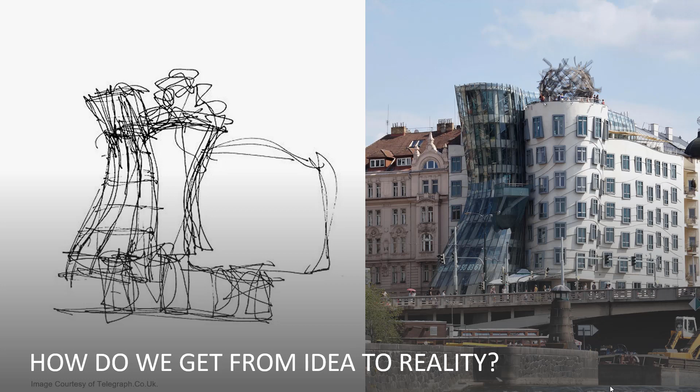To really understand the business value of computational and generative design, let's start by looking at the evolution of ideation in architecture. Traditionally, a building design in architecture was expressed as a single idea, or a parti, meaning the departure point or grand driving idea in a design. Buildings have traditionally been conceived from very broad ideas and sketches, and then refined into the final form. The most basic way we've had historically to express our ideas is with simple lines and forms grounded in reality, such as lines in the soil or sand, arrangements of stone and earth, or charcoal sketches in caves like Lascaux.

With this expression, we're able to convey a wide array of ideas at specific sites, but these ideas were subject to erosion with exposure to the elements, so we turned to a more easily protected medium that allowed for off-site and also mobile expression: paper. With the advent of paper, our ability to ideate expanded into sketches, technical drawings, perspectival renderings, paintings, and we were able to protect our ideas. However, we're not able to easily make changes to our drawings or demonstrate ideas consistently.

And so, with the advent of computing technology, we're able to harness the power of application development to translate the manual process of ideation into a digital space. One where we're able to replicate our previous methods of mark making, with added benefits such as consistent legibility of line weights and repeatable design elements. Moving ideation into the digital space did, however, have a certain degree of drawbacks. Collaborating on ideas was difficult. Model making and drawing were still separate processes. And any insights were generally done as manual calculations and then recorded and manually input into schedules. And so we needed a more robust, integrated process for ideation.

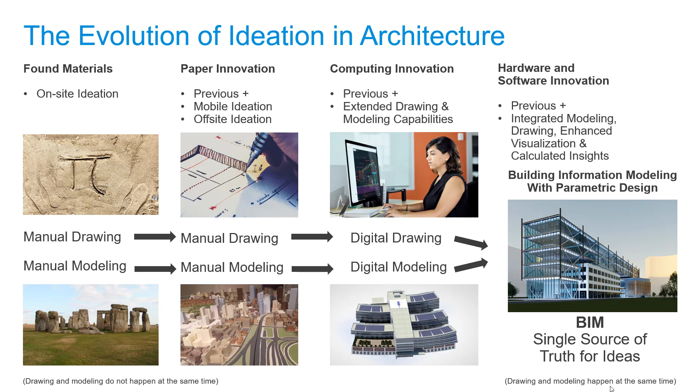With the advent of BIM, we're seeing exponential growth in the next generation of ideation evolution. We're simultaneously seeing innovations in cloud computing, hardware and software capabilities, and artificial intelligence. With these innovations, tools for ideation are evolving to include immersive visualization, enhanced collaboration, automation of design processes, optimization of designs through option generation, and predictive assistance in achieving design goals and project outcomes. So these new ways of working will help us spend less time occupied in repetitive tasks and tedious design option exploration, as complexity of designs is growing while timelines are becoming shorter.

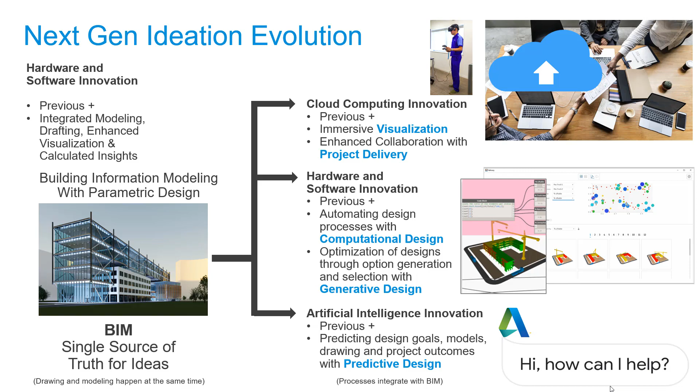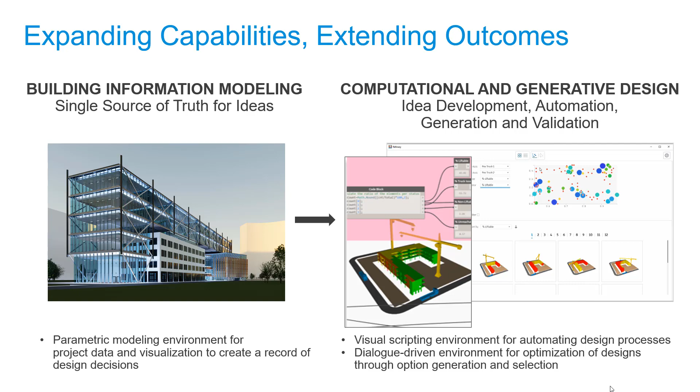Computational and generative design are critical ingredients in the recipe for more efficient building design workflows. Computational design is a term to describe the capability to automate processes, from basic repetitive tasks to geometry creation. Generative design is the term used to describe the capability to optimize processes, utilizing design option generation and evaluation tools to validate designs. These are the two emerging ways of designing that we'll focus on in the context of strategy, adding value, and winning more work.

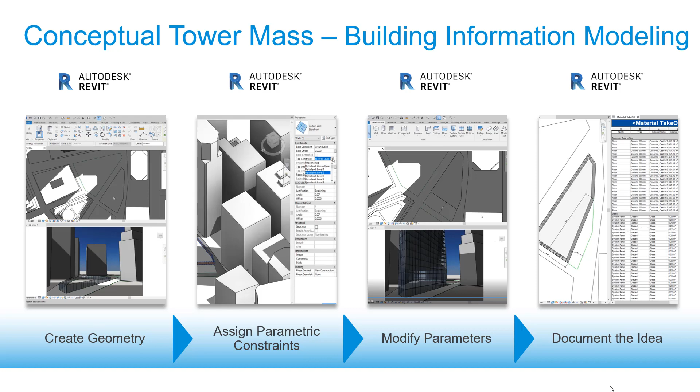When the final design is decided on, the idea may then be transferred from the Dynamo environment into Revit and documented in the Revit environment. The major benefit of Dynamo is that if you need to create the study again, you may now automate the process entirely in a future project environment.

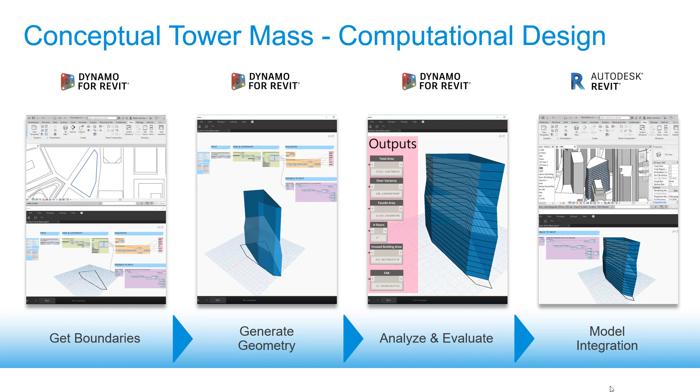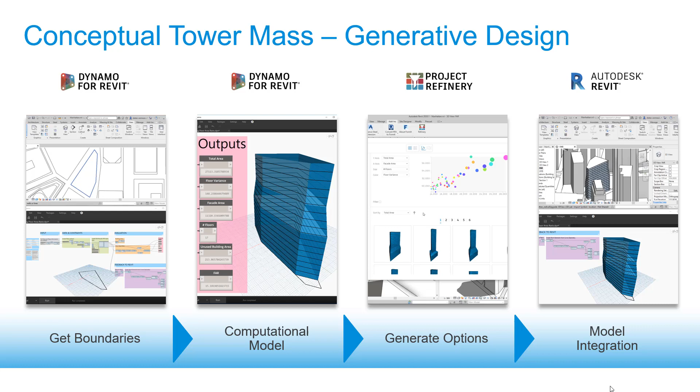When the final design is decided on, the idea may then be transferred from the Refinery environment to Dynamo and into Revit for documentation. The major benefits of this workflow are the ability to automate the generation of geometry, automate the generation of design options, and maintain a record of informed decisions.

Let's talk now on a higher level about project strategy. When designing with what I'll refer to as a traditional project strategy, business leaders within a company are typically kicking off projects with a small circle of stakeholders to identify the project type, some of the big ideas for development, and think about the type of processes that might be used to complete the design work. The design process is a mix of proactive and reactive work, where ideas are produced in charrettes, reviewed in critiques, and often result in sequences of revelations during the iterative portion of the design process. Following iteration, construction is completed, as-builts are delivered, and the project is closed out. Design teams rapidly move on to the next project.

In traditional project strategy, the method for developing design options is a little bit like a game of Battleship. Ideas are tested one at a time, often without enough information to get a hit the first time. We ask ourselves, does this work? What about this? We might get a hit, or we might get a miss. Oftentimes, only a few designs can really be evaluated because the design team runs out of money or time, and the evaluation process can be frustrating, as goals may not be clearly defined to even test against.

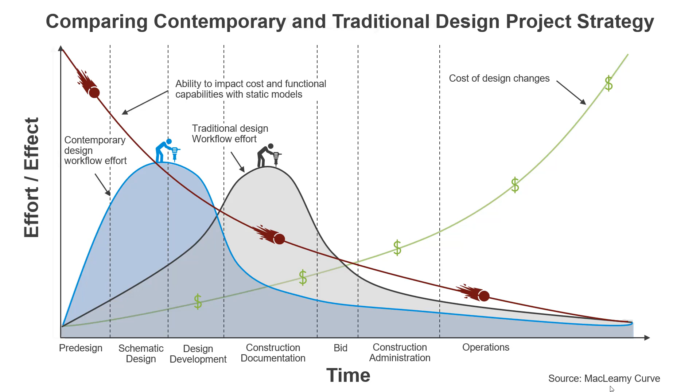The future of project strategy has been heavily influenced by the capabilities of computational and generative design. In order to automate and optimize workflows in the development phase of the design process, a rigorous and extensive discovery process of project and design goals and constraints is required. The design process is then largely proactive, yet flexible, providing the opportunity for downstream ideas to inform upstream development framework, and for specialists to have more and more meaningful conversations, informing design outcomes at any stage of the process.

Beyond simply creating buildings, the future of building strategy is expanding into capturing insights from the building's life cycle, to close the loop between design and execution, and also reality, and using the same data to inform future building typologies, leading to growth opportunity for strategy adopters.

We're calling the next evolution of design strategy outcome-driven design. And we're defining this as a focus on value-driven design and construction with democratized collaboration for enhanced building performance, process efficiency, and realized aligned outcomes. One noticeable difference between our previous strategies and this new strategy is that there's a wider funnel at the outset of work, and that we've expanded our opportunities beyond that of building design into lifecycle management, data aggregation and analysis, and project typology data curation.

With the introduction of outcome-driven design, we can see that the effort put into a building design project is shifting significantly into the pre-design and schematic design phases, and that our ability to design with flexible parametric models, informed by computational and generative design toolsets, allows us to impact cost and functional capabilities later and later on in the design process. An architectural project is difficult to change once it's built, but using flexible modeling tools, designers can delay finalizing decisions until the model is baked.

With the design effort shifted forward, we have opportunities to improve our visualization capabilities by adopting emerging workflows such as Revit and Unity Reflect, pour more time into researching and resourcing local and sustainable materials and systems, and review performance data in Insight, as well as spend more time researching and digging into detailing on the project.

Beyond the traditional design duties, when we implement an approach to design that maintains our relationship with the client throughout the operations of the building, this allows for the curation of the building performance data through advanced analytics. And then we have opportunities to point out where design for the building could advance into a new scope of work or a new system specification.

Also, everything that we learn about how the building is actually performing versus how we expected the building to perform can be integrated into a building database by typology and used to inform the future of your building design with predictive analytics. Now is the time to prepare your data for the emergence of artificial intelligence technologies.

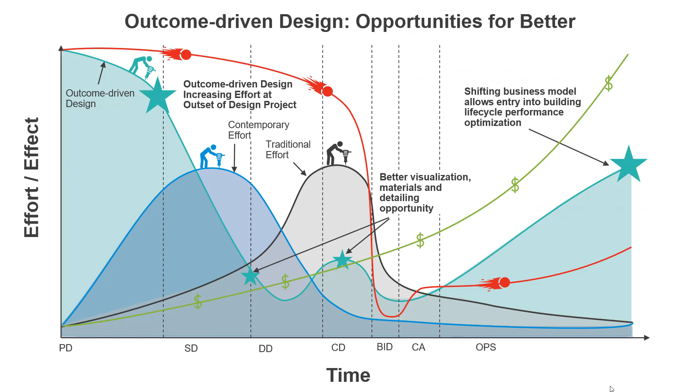In outcome-driven design, there are 5 key components. With strategic planning, the goal is to align all upstream and downstream stakeholders to identify what everyone needs up front to ensure project success. With outcome-driven design, goals and constraints drive the development of form and order in the building information model, with an emphasis on building performance. With parametric analysis, there's an ongoing dashboard of all of the big picture project aspects, like counts, costs, energy analysis, etc., that give the designer the ability to pivot and course correct the project in real time.

With integrated project delivery, we're collaborating in an integrated way that will allow for fast and seamless transfer of data between projects. And with operational nurture, we're extending the scope of our services beyond that of traditional architecture and into customer success, seeing the building through its life cycle process and acting as trusted advisors to our clients.

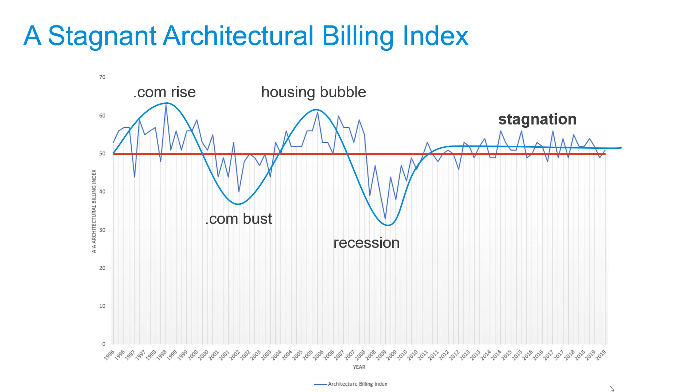On top of this disconnect, we're operating with a stagnating architectural billing index in an uncertain market. And recently, in the US, we're experiencing some billing index woes. The frustrating part of this is that architects' fees are such a relatively small part, 10%, of the total design and construction costs for a building, and 0.01% of the total building lifecycle costs. It would only take a fraction of the cost of the overall design and construction costs of a building to increase our fees. But this is really very rarely the reality.

And we're working amid a really disincentivizing compensation system. The vast majority of work comes in as lump sum or fixed fee payment structure. We're seeing a lot of difficulty in negotiating for higher sums at the onset of a project for building design teams in this fee structure. Margins are tight and competition's fierce, and it's easy for competitors to underbid.

And in researching the topic of payment structures, I've been hearing better feedback on rates from architects working on an hourly basis or otherwise. Not only is the difficulty in negotiating hurting us, but also in the lump sum fixed fee structure, we're seeing the risk transferred onto the building design team for work completed. And we're working with a client who may not have any special consideration for the process by which we work. So something fundamentally critical for our industry to implement in our projects, such as sustainable design practices, may be easily disregarded by all parties.

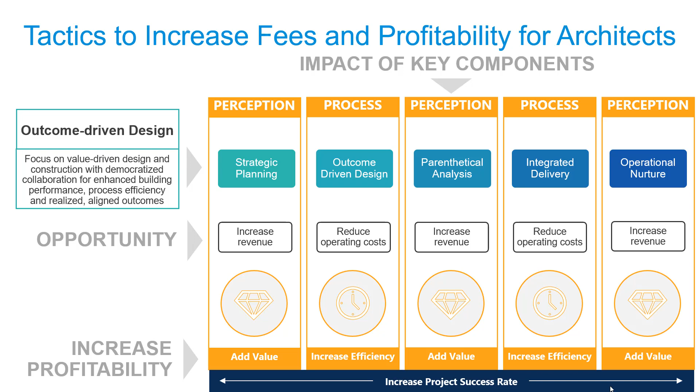With the emergence of outcome-driven design and integrated delivery, we're able to set clear targets and expand the amount of work we're able to do exponentially in significantly smaller amounts of time to increase efficiency and reduce operating costs for design firms as well as clients when completing the design of a building. With all 5 of these components in place, we're able to increase our project success rates and win new work.

With the implementation of this strategy, we're going to see several new roles emerge. A design strategist will be critical in the strategic planning phases of work, where skills such as Luma training and soft skills guide the gleaning of project requirements from key stakeholders. The design strategist will work closely with the design analyst and the outcome-driven design team to ensure that the value captured from clients turns into measurable metrics that drive design and are tracked and analyzed throughout the project.

A design technologist is one part of the design technology team that will ensure that all design processes are optimized for efficiency for building design. The design analyst will be a new role that operates as the air traffic controller for ongoing projects and will track performance metrics as the design develops, flagging aspects of the model as they underperform or go off the rails, and ensure that the project team is aware and able to pivot for project success.

The delivery technologist works closely with the design technology team and ensures that collaboration capabilities are utilized and functioning properly for federated models. The building design outcomes lead is the main interface between the company and the client during the operational phase of the building and ensures that the building operates as expected, provides insight into emerging systems and technologies to implement, and discovers new scopes of work based on usage. Ultimately, the building design outcomes lead is responsible for ensuring customer success, anticipating needs, and maintaining a long-term relationship with the client.

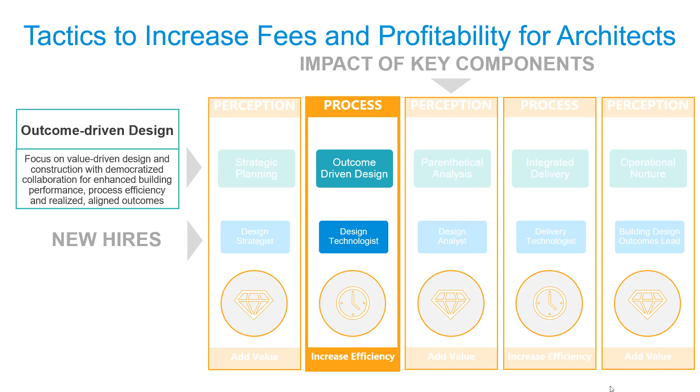For the sake of our focus on the business value of computational and generative design, let's drill down into the design technologist and the design technology team. These are the key players for the future of design technology. They will all be able to concentrate, recognize patterns and moves ahead, synthesize combinations, connect field experience with abstract logic, and capture datasets required for abstract logic development. The CTO acts as the strategist and liaison for the design technology team to executive staff within the company.

The design technologist role is to look at emerging technologies in a broad way and vet the application of tech for usage in projects. The BIM manager role is to develop and ensure that all projects in the company are using the same template, data standards, and model management practices. The computational designer role is for a specialist with extensive coding knowledge to develop graphs that automate tedious processes for the company. The generative designer has a role that is part technical and part analytical, and requires the ability to move back and forth between strategic planning, value discovery, performance metric alignment, process implementation, and review.

In a very small business, one person may act in all of these roles. But given the levels of development in each arena, I would strongly recommend filling these 5 roles as part of every technology team to ensure that your company is at the front end of the outcome-driven design adoption wave.

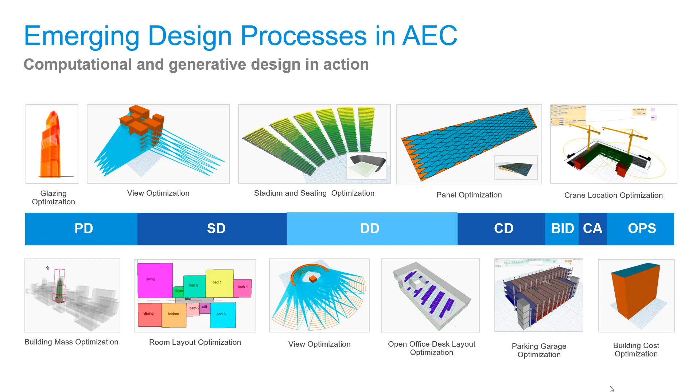Whether optimizing building forms based on view opportunities, glazing, or cost, or ensuring that desks are laid out the best possible way, computational and generative design are making process automation and optimization possible and integral to the design process. To get started with computational design, the tool to use is Dynamo, Autodesk's premier computational design tool. With Dynamo, you can save time by automating processes and model more sophisticated design geometry using simple data, logic, and analysis.

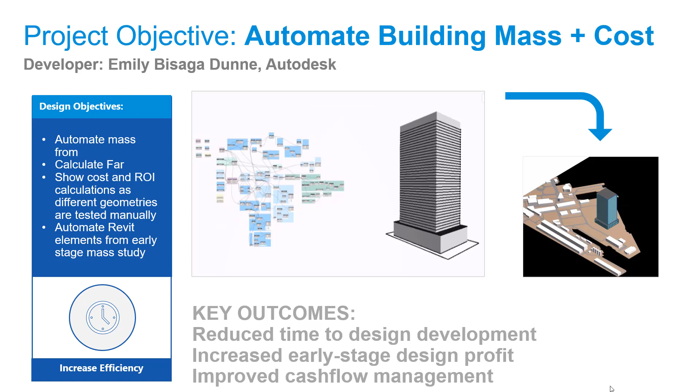With Dynamo, changes and updates to projects become exponentially easier and more time efficient. In this example, we're looking at an early stage design study with an objective of automating the building mass and cost. This example shows testing a variety of variables for a rectilinear massing model to optimize the tower ROI, or return on investment, by way of Dynamo for the key outcomes of reduced time to design development, increased early stage design profit, and improved cash flow management.

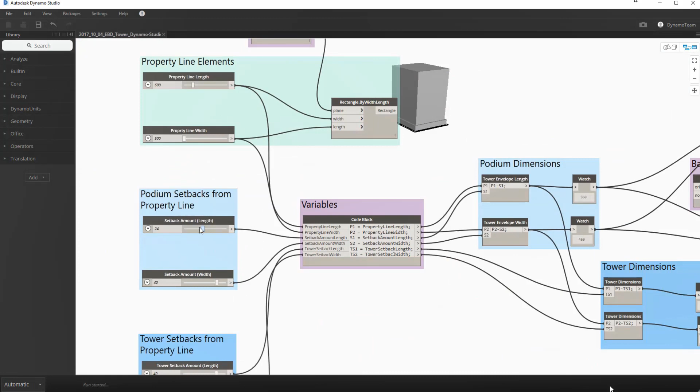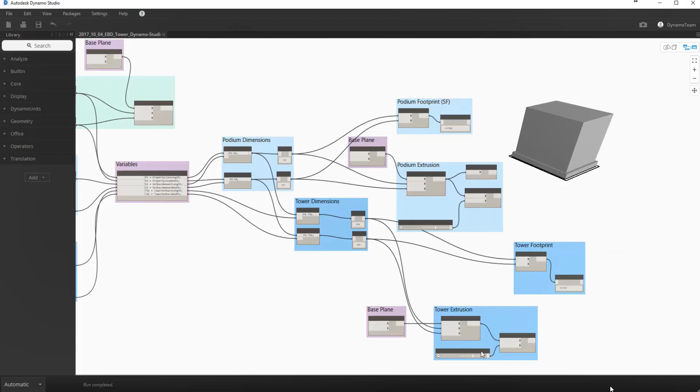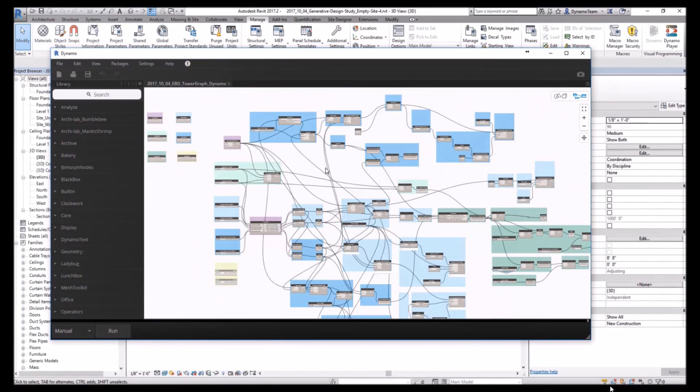You can see that it's possible to flex parameters with sliders in the Dynamo environment, and in turn, this flexes the geometry for the tower height, and also the tower floors and podium, and even setback-driven geometry. Levels are defined within the Dynamo environment, and the mass is brought into Revit, where it's possible to generate roofs, walls, and floors from the conceptual study in Dynamo. Here we see the realized form in the Dynamo environment as well as in the Revit environment.

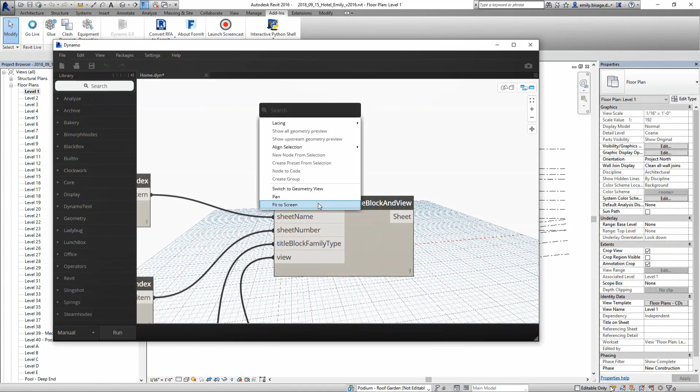Beyond geometric iteration, Dynamo is incredibly useful for automating repetitive tasks that consume countless hours during the design process. In this example, we're automating sheet development and placing views on sheets for the key outcomes of reduced time to design development, increased early stage design profit, and improved design change management. In this example, we can see that there are 40 views in the project browser for levels 1 through 40, and the task at hand is to create sheets for these views and place these views on the sheet. A task that may typically take a team member 30 minutes to an hour may now be completed in 5 minutes with the click of a button and a reusable Dynamo script.

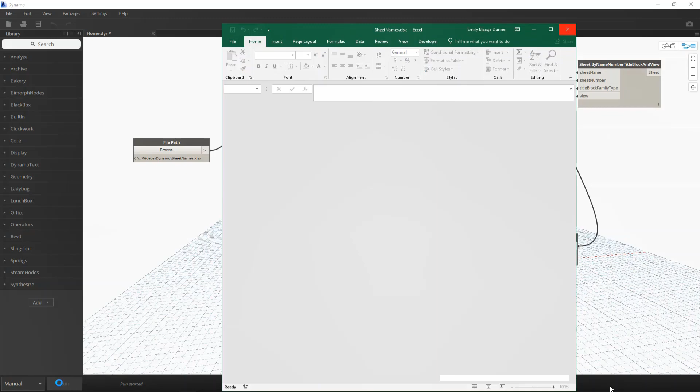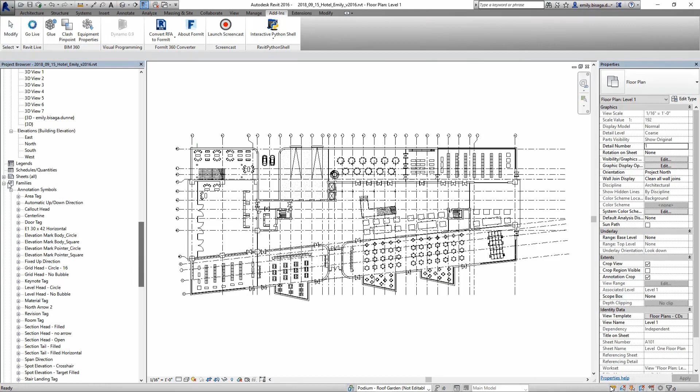As you can see, we've launched Dynamo from the Revit add-ins toolbar, and we have a script ready to go for the task at hand. In this case, we're driving the sheet names and numbers with data from Excel and using some clever filtering in a list to specify the views to place on the sheets. As we run the script, using the manual run process, the Excel sheet opens up, while referenced, and Revit and Dynamo work together in the background to complete the task. With enough time for you to get a coffee, come back to your desk, the run is completed a few minutes later. And we can see in Revit that the sheets have been automatically added to the project, and the views are placed on the sheets. Pretty cool.

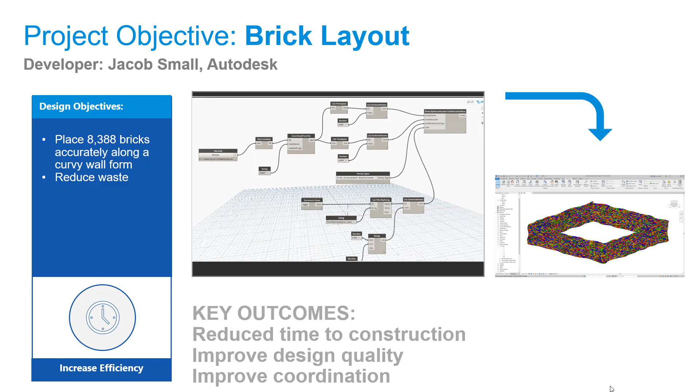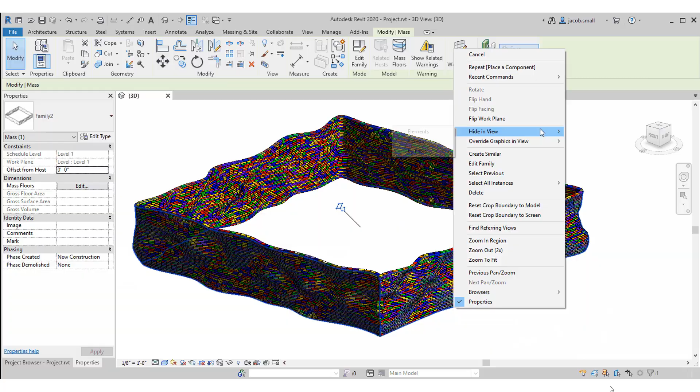In this example, by Jacob Small, we're reviewing the automation of placing 8,388 bricks on a curved wall for the key outcomes of reduced time to construction, improved design quality, and improved coordination. This allows us to build up a meaningful digital version of the model as the bricklayer would lay it out on site to optimize the location of control joints and sequencing, and ensure that the brick course is laid out properly or not. Here you can see all of the bricks laid out in the Revit environment. It's really, really impressive what you can do using Dynamo to automate tedious tasks.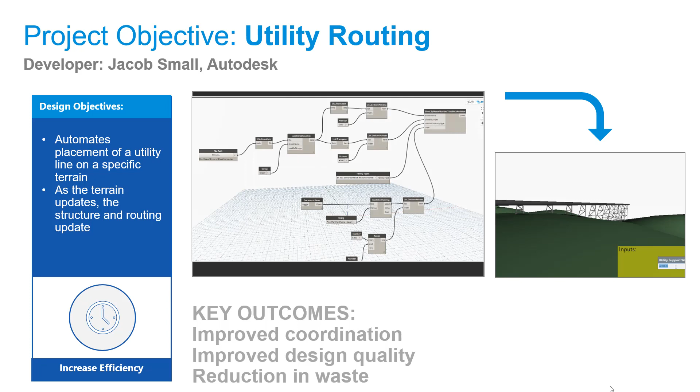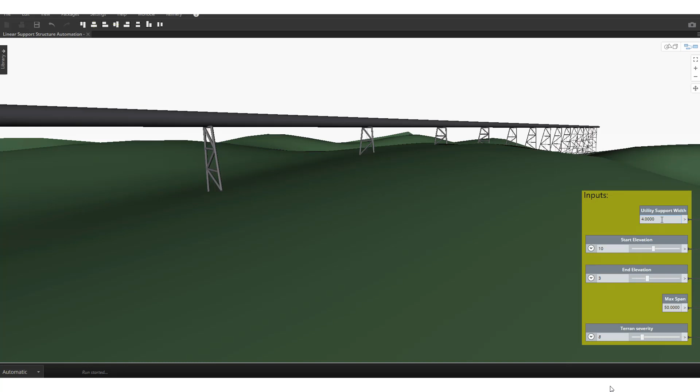In this example by Jacob Small, we're automating utility routing by automatically updating the utility line placement and structure on the landscape as the topography changes. This graph actually parametrically builds up support structures, and this results in improved coordination, improved design quality, and a reduction in waste. This example works using both Revit and Civil 3D. As mentioned, when the terrain's updated, the structure that supports lines is also updated. The structure really then informs the routing of the utility and uses the least amount of materials possible. You can see that parameters are adjusted in the inputs portion of the graph, and the geometry is then updated in a visual way in Dynamo's geometry preview.

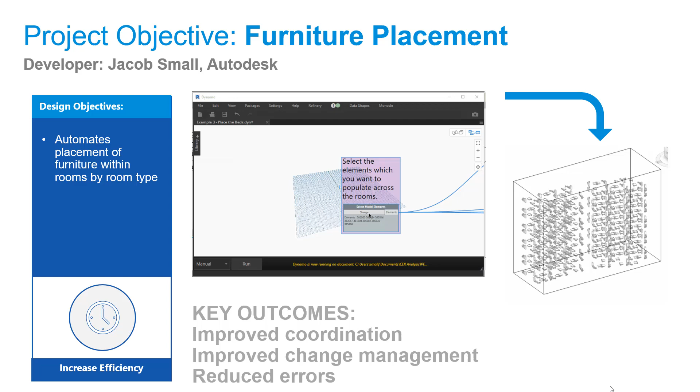In this example by Jacob Small, we're able to automate the placement of furniture by room type, resulting in advanced propagation of changes in the Revit model, and also in improved data for fabrication, reduced waste, and reduced cost. In this example, we start in Revit and review which room we would like to copy elements from, and make sure that we paste that string into the Dynamo graph. Next, we're also selecting the elements that we want to populate across all of the other rooms in the project. You can see in Revit that the elements are being selected after selecting the Dynamo node for the elements to be selected from.

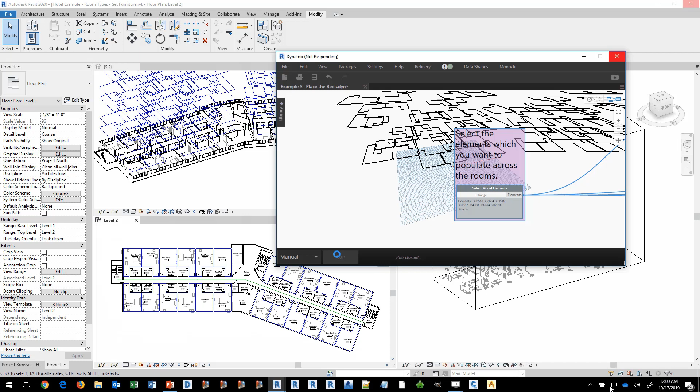Once all of this is selected, we then go into our Dynamo graph and we're able to run this manually. And when we do that, you'll see that across the entire project, all of these units are updated with the proper furniture. This is an extremely efficient way to make updates, especially for a project typology like multifamily development.

In this example by Dieter Vermeulen, Dynamo is used to automate conceptual structural steel designs. This is a Diagrid structure for the Mars Torus Arena. The geometry in the study is created by minimizing waste, structural weight, and total cost of the structure, including influence of tooling, such as connections, beam cuts, etc. And this results in improved data for fabrication, reduced waste, and reduced cost.

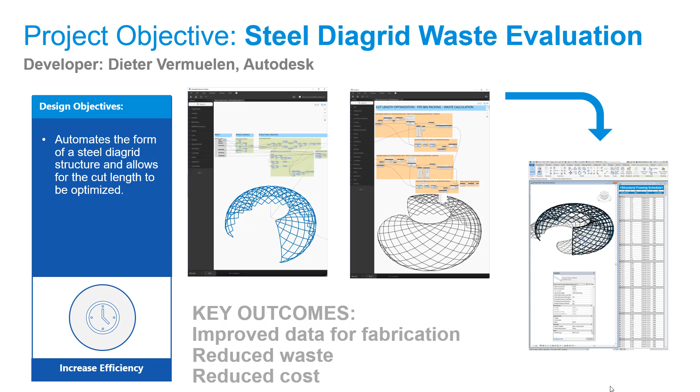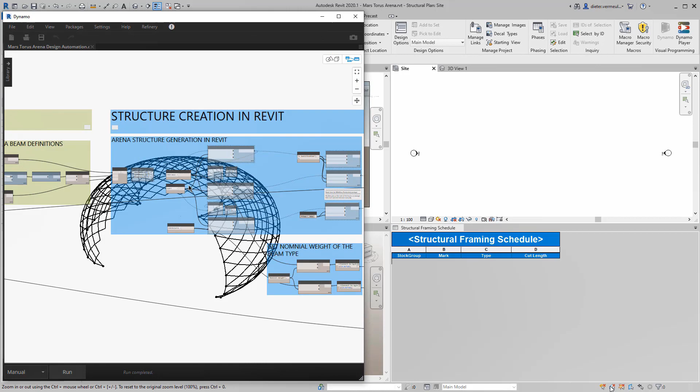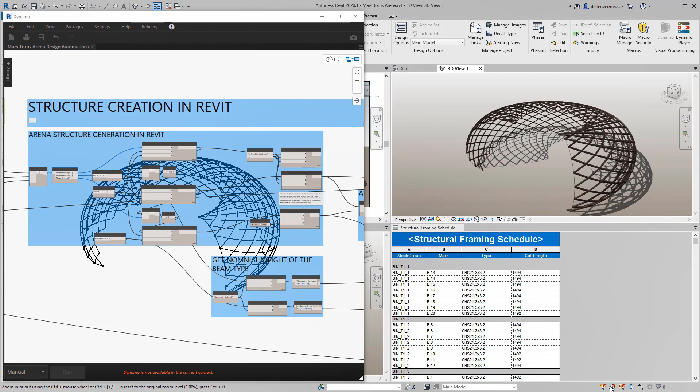The variables for the structure are dimensions such as the height of the torus and the division of the diagrid. A business value for a customer utilizing this method of design is that they can generate structural designs that are economic, also lightweighted, and more importantly, cause less steel manufacturing waste. Dynamo allows us to understand design options in a visual way, and the geometry can be studied using sliders within Dynamo and again visualized within Dynamo and Revit.

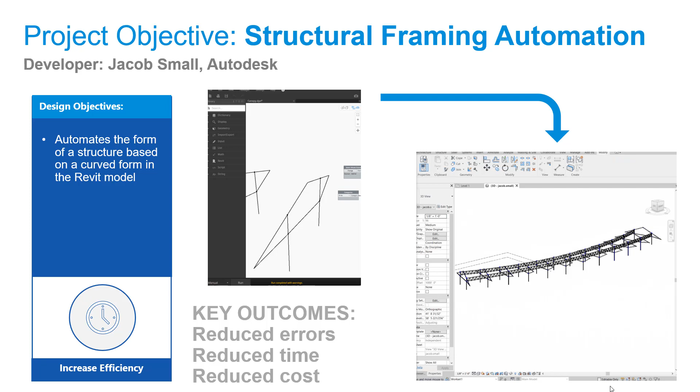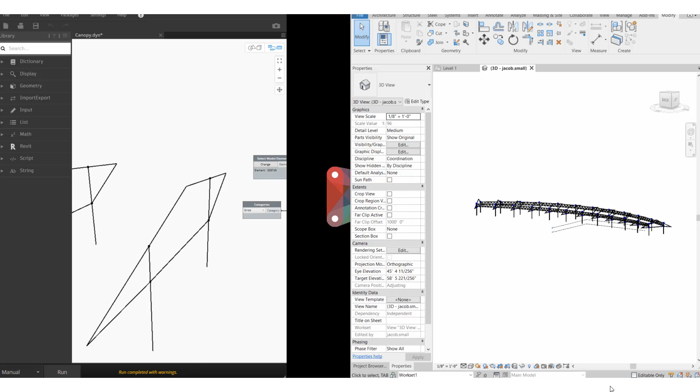In this example by Jacob Small, Dynamo is used to automate the structure of a curved form in Revit in order to reduce errors in production, reduce time of production, and reduce the overall cost of the system. This is a great example to just show a very practical application of Dynamo in the structural phase of a project for efficiency gains. We're able to select geometry in Revit and run a graph in Dynamo that then automates the structure of a building form even when complex and curvy.

This video by Artem Boyko was making rounds on the internet lately, showing an automated process of placing columns, plinths, trusses, and sandwich panels versus a manual process, and had a runtime of 1 minute 10 seconds versus 1 hour 2 minutes. I would recommend running the numbers for time to completion and number of errors on manual processes to get a sense of baseline figures, and then calculate the automated time to completion and multiply by the number of projects in your firm to understand both time savings on a single project and also time savings and ultimately cost savings on your entire company by implementing these processes.

The additional benefit of automating tedious tasks is that there will be a reduction in errors from X% to 0%. And this is extremely valuable to note, as we know that small problems upstream can trickle down into larger problems downstream, with major cost implications in the design process.

Project Refinery is an Autodesk generative design beta for the architecture, engineering, and construction industry that gives you the power to quickly explore and optimize your Dynamo designs. With Project Refinery, changes and updates to projects become exponentially easier and more time efficient.

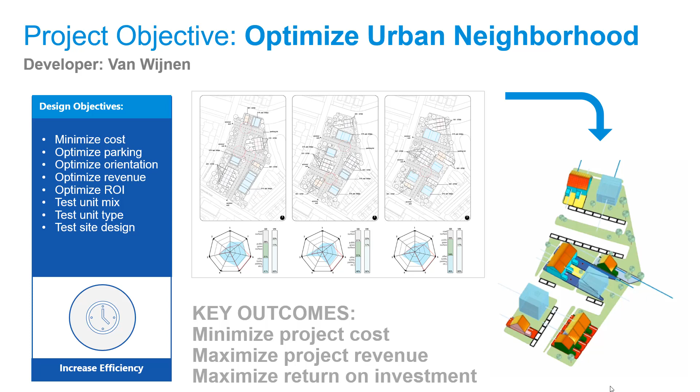As a result, the designers on the project were able to maximize the amount of solar energy collected to meet their net zero energy goals. They optimized backyard size and views to meet the human needs of their occupants, and they optimized cost and profit to meet the business needs of their company.

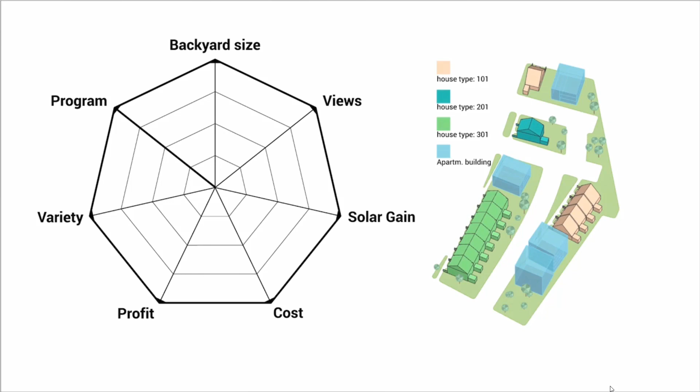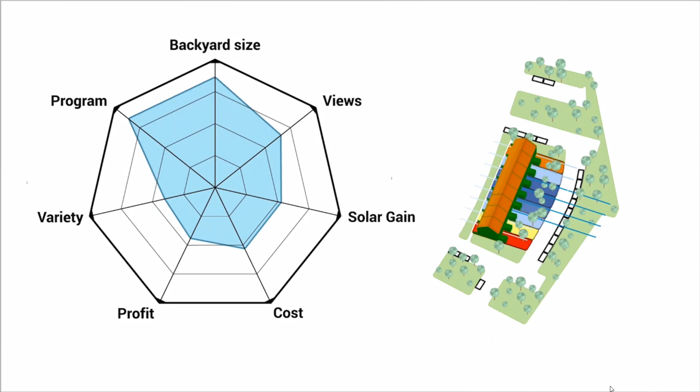Here, we're looking at what is commonly referred to as a spider graph in the generative design world. This graph shows the values that are critical to project development, such as views, solar gain, cost, profit, variety, program, and backyard size. The design elements related to the ideals are revealed as the graph advances in the visuals. As the studies run and the designs shift, the results are shown in a way that makes it easy to understand the push and pull between the values involved and ultimately choose the optimal design.

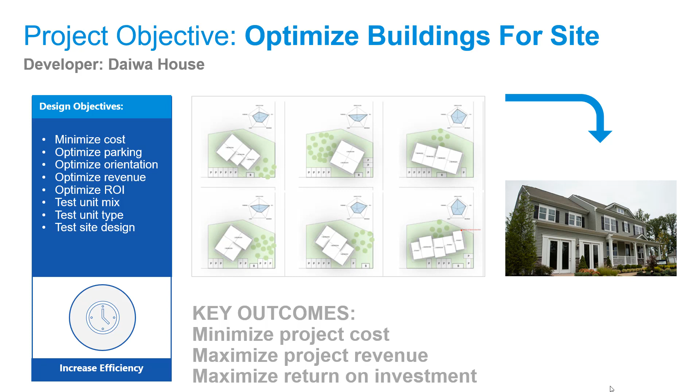In this example, by Daiwa House Group, we're reviewing the optimization of buildings for a site. Daiwa House is a company located in Japan that has been taking an industrialized approach to the craft of designing housing for decades. Today, housing is still one of their core businesses, but they've used automation and optimization to extend their industrialized approach to condominium and care homes, resorts and retail parks, hotels, and even hospitals. Daiwa House Group uses Autodesk generative design tools to identify the best small developments to build on small pockets of urban land. Designs are optimized based on a variety of factors such as cost, parking, orientation, ROI, and even revenue.

Again, we're seeing the utilization of the spider graph to optimize the layout of the site and review the results in relationship to the values that are driving the design. And this leads us to optimal solutions for development.

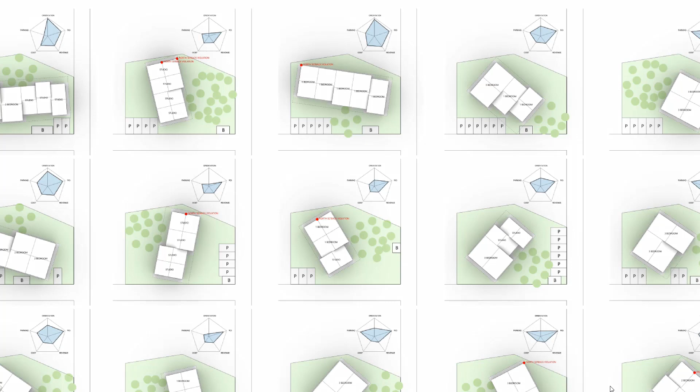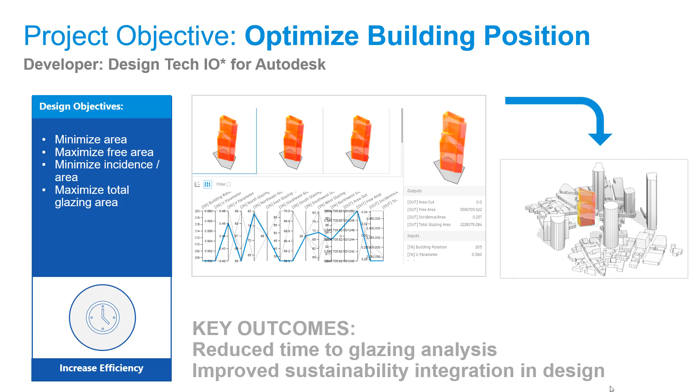This is an example by DesignTech.io, and we're looking at optimizing the building position on the site. Starting from the selection of a tower mass, the graph here iterates to find the best position within the site boundaries, taking into account the solar incidence and total glazing of the building, resulting in reduced time to glazing analysis and improved sustainable integration in design.

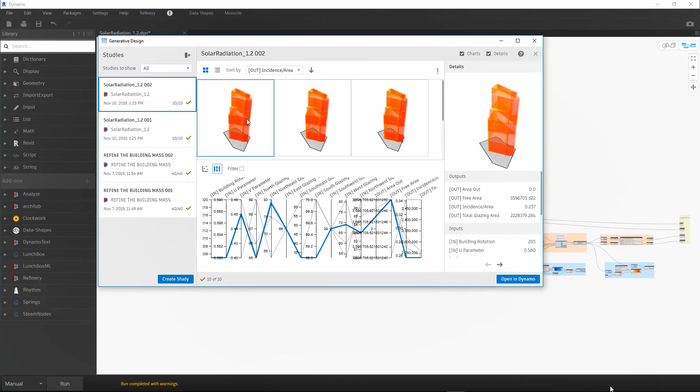We can see the mass in Dynamo, and in this example, Project Refinery is being used to generate options and drill down into the best possible selection by filtering based on solar incidence and glazing performance. To avoid options that don't comply, specifically that are outside of the site boundary, the results are heavily penalized, saving computational time by making the analysis actually fail on purpose.

The result of all of this is the optimized building form shown here, and we're actually able to push this data into Revit and continue on with the design.

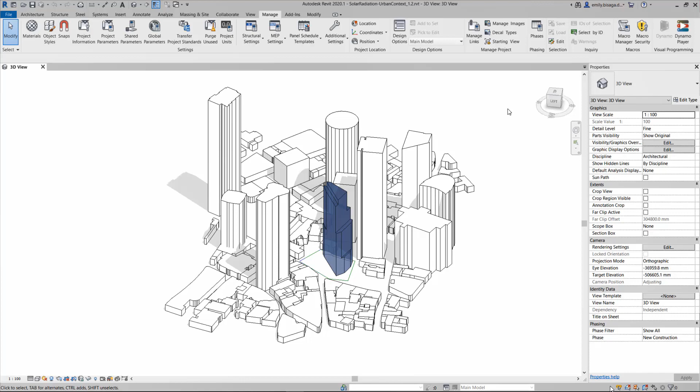In this example, by the Project Refinery team at Autodesk, we're reviewing the optimization of the building program for a mass in the early stage of design. This study explores the allocation of retail and office space distribution while minimizing cost and maximizing rentable area. And this results in minimizing project cost, maximizing project value per year, and adding demonstrated value through pro forma analysis visualization.

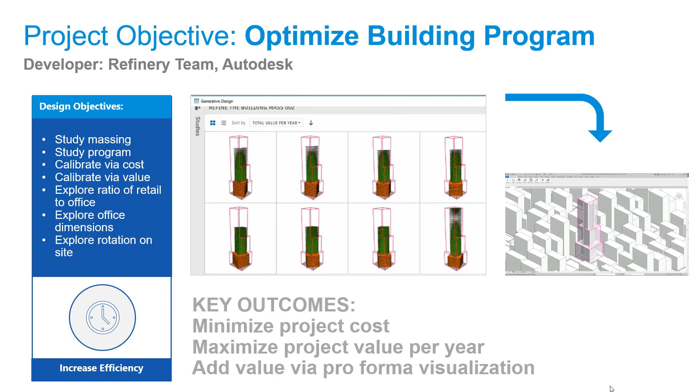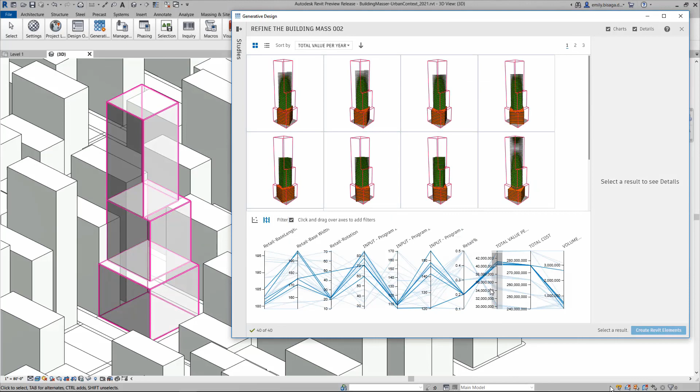This video, shown during the AEC keynote at AU, shows generative design integrated in the Revit environment, showing the ability to run the optimization without entering the visual scripting environment of Dynamo, making generative design processes more mainstream so that more design teams have this supercharged ability to explore the best possible solutions. This example studies massing and programmatic distributions for an urban site.

In this example, by Jacob Small, we're reviewing the optimization of a floor plan layout based on proximity and noise ratings and scores. In the space planning graph, we're able to test out thousands of different designs for a floor plan and find the optimal solution.

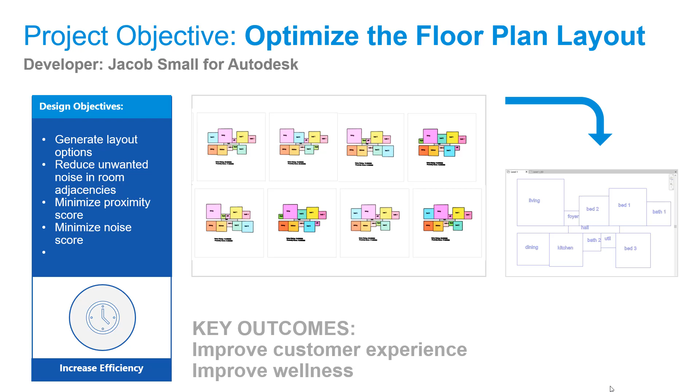This example starts in Excel, where data for noise and proximity scores are developed and adjusted. This data is then brought into Dynamo, and we're able to make manual adjustments to room layout with the slider option in Dynamo. Project Refinery makes it possible to study hundreds or even thousands of options as necessary, and filter down to the best possible option.

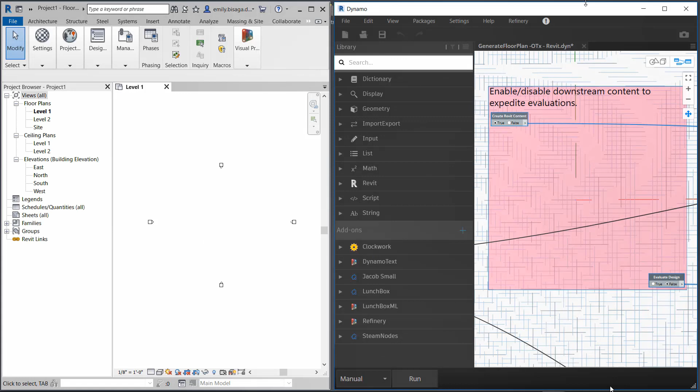Once the final design is chosen, Dynamo automates the creation of room separation lines in Revit, where the design team is then able to keep going with the design. In this process, we have the implementation and automation on the front end, and manual processes on the back end of the design.

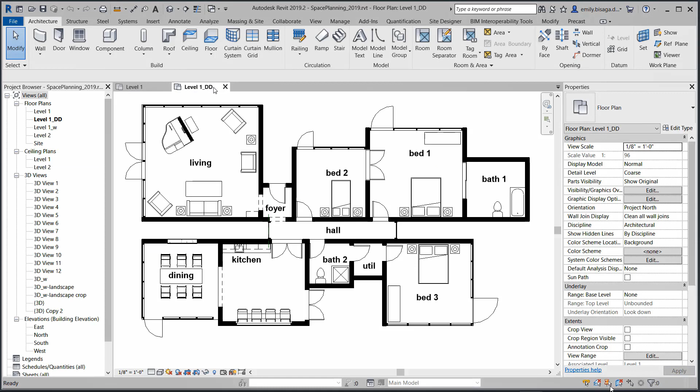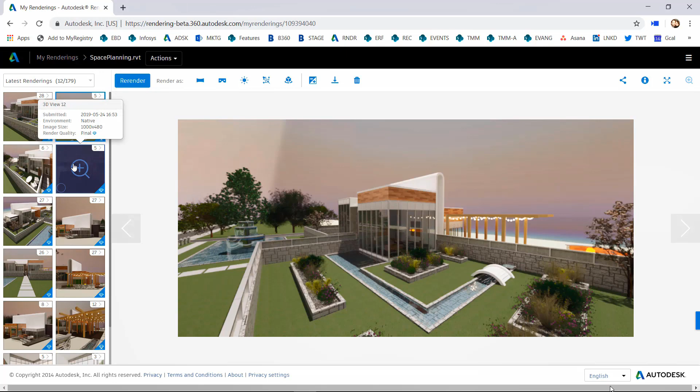I really like showing this example because this process highlights the importance of the design team in guiding the project successfully through the design development portion of the timeline, and shows that at certain points in design projects, and for certain building typologies, our crafted approach is still an ideal and completely valid approach to design. The future of design will always require the human hand and human touch to drive visualization, materials, systems innovation, sustainability research, and the subtleties of meeting client needs.

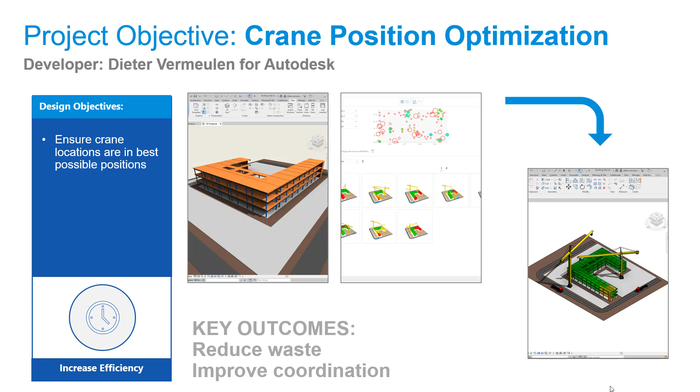In this example by Vermeulen, we're reviewing a crane position optimization that evaluates the imported crane construction elements from Revit through SAT based on their weight and distance to a double tower crane setup. The calculation groups elements per lift status and returns a total lift score for the situation. This results in reduced waste and improved coordination.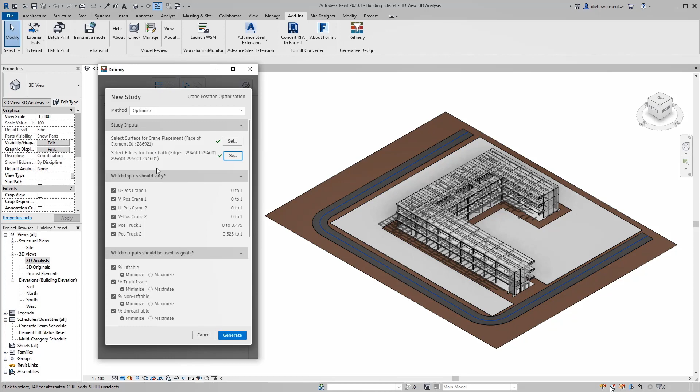Building elements such as walls, floors, columns, and beams are imported through SAT, and data references such as crane capacity tables are constructed at the beginning of the graph. The input for the optimization is both crane and truck positions, and the goals are based on lift score as well as time, using the distance of the truck to crane and crane to solid center point as indication of time, and trying to minimize the time that the crane is used for each installation.

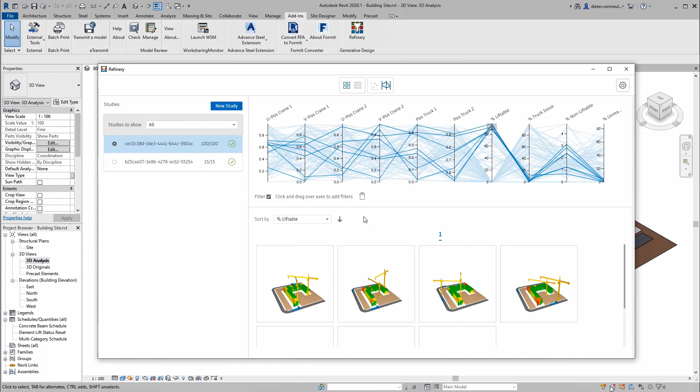The resulting options show the scores for the crane positions relative to time and make optimal selections a simple task for the design study.

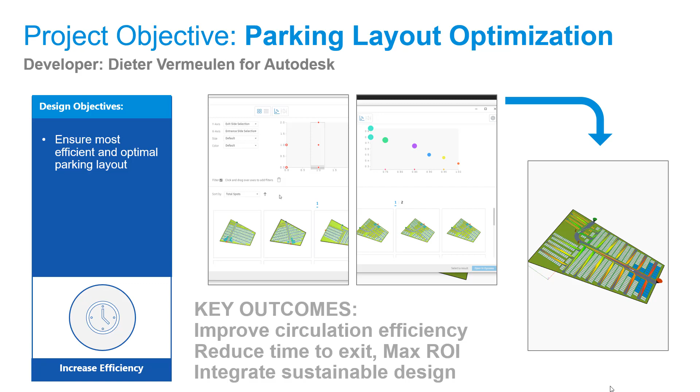In this example, by Vermeulen, we're reviewing parking layout optimization. We're able to optimize the location of entries and exits, the direction of rows in the layout, the density of the layout itself, the location of payment terminals, and the location and density of electric vehicles, resulting in improved circulation efficiency, reduced time to exit, maximized ROI, and integrated sustainable design.

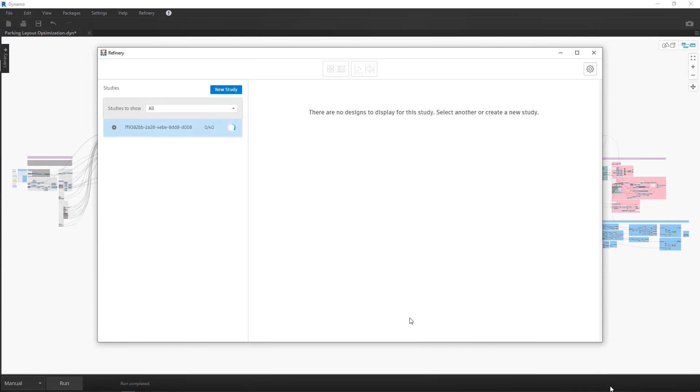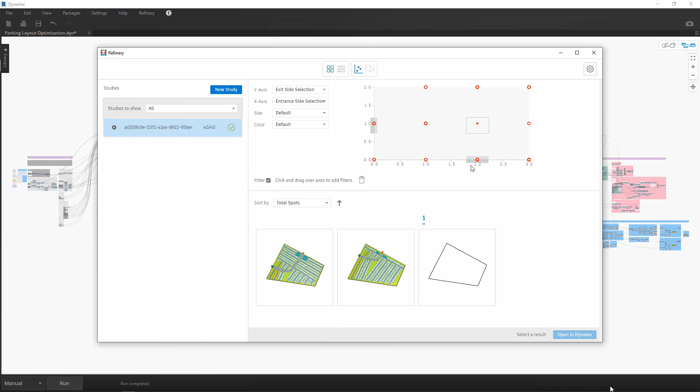We're looking at the graph in Dynamo that drives the relationships between elements and the visualization of the design. Utilizing Project Refinery, a study is created that allows for optimization of which side the entrance and exit are on, as well as where the points for the positions of those elements are located. Also, which directions the two rows for the lot run in, and also for the density and location of terminals and electric vehicles.

Refinery helps the designer sort and filter down to the best possible options. This type of capability development will have a lot of meaning for real estate developers and designers looking to visualize early-stage ideas about site development quickly with trade-off analysis.

In this example by The Living, a design studio within Autodesk, we're looking at a very complex method of optimizing an open office layout. The context of this project is that Autodesk moved our Toronto office to a new office in the MaRS Discovery District, and The Living used a generative design approach to design the new office's space layout.

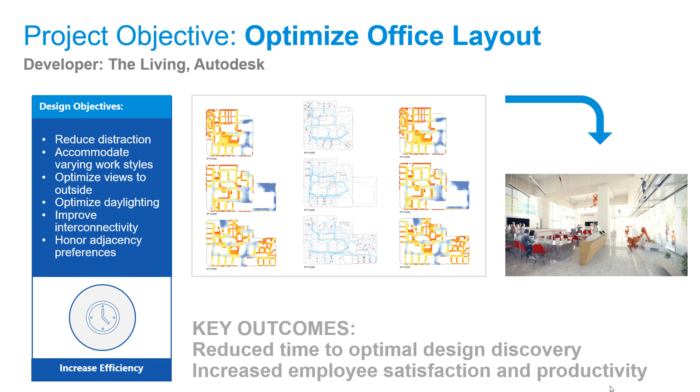They started by surveying the participants of the existing office, asking them questions like, what groups do you want to sit by? How much distraction can you handle at your desk? Is daylighting important? They boiled all this data down to 6 measurable goals for a good office and created algorithms to measure each goal and develop the design, resulting in reduced time to optimal design discovery and increased employee satisfaction and productivity.

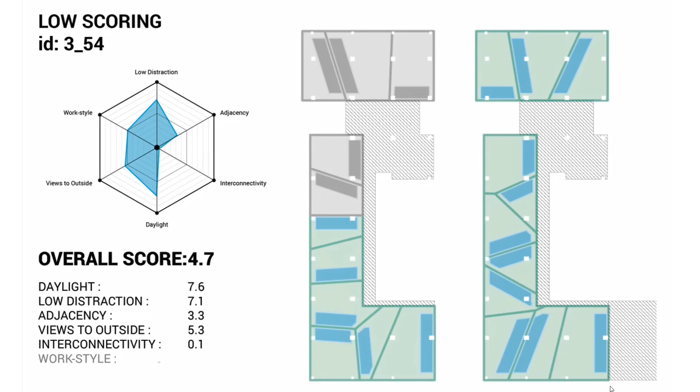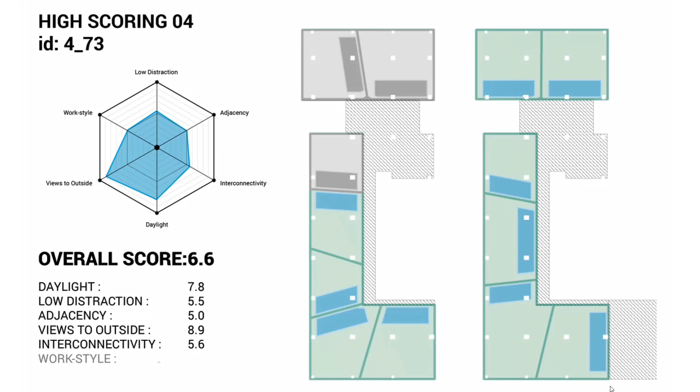Here you can see the process running as different floor plan layouts are created, each with blue amenity bars of meeting rooms and yellow locations of desks. Each design option also involves a dashboard of performance according to its score on the 6 goals. We can see the spider graph revealing score relationships for daylight, distraction, adjacency, views to outside, and interconnectivity.

The ultimate takeaway from generative design studies is that we're able to achieve so much more than we were ever capable of by hand. And this is going to give us more time to add more value to projects and extend our services, as well as reduce time on operating costs where those costs are simply unnecessary.

With generative design, the outcome of the search and discovery process is completely dependent on the design of the design space, as well as the specification of various measures and search parameters. So, how do you design a good design space? Some things to keep in mind. Values and outcomes are equally as important as the building design itself.

And we need to rethink the emphasis we put on value discovery through the integration of a highly involved strategic planning process for all design projects that involves offsites with stakeholders up and downstream for 1 to even several weeks, and places emphasis on how we design the framework of our designs, rather than just completing designs themselves.

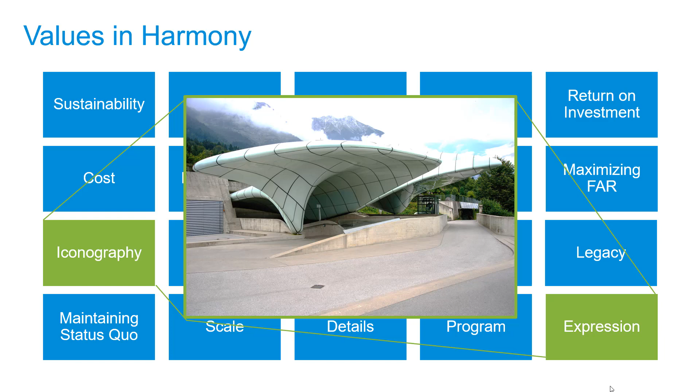For buildings, it's possible to have values in harmony that result in innovative forms, such as this building by Zaha Hadid. And it's also possible to have a very large sample of values that lead to a complex design, such as this academic building. It's also possible to have competing values, even from the same client, that lead to conflicts in design desires and option generation. The earlier the design team can discover something like this, the better.

Outcomes ultimately drive investment, and this is another critical aspect of implementing a generative design process. When money's on the line, the person controlling the funding needs to clearly understand how their investment will bring them a return and what this means for their bottom line. Oftentimes, emerging technologies are put aside because they require an upfront investment, and there's not a clear sense of the business outcomes for adopting these practices.

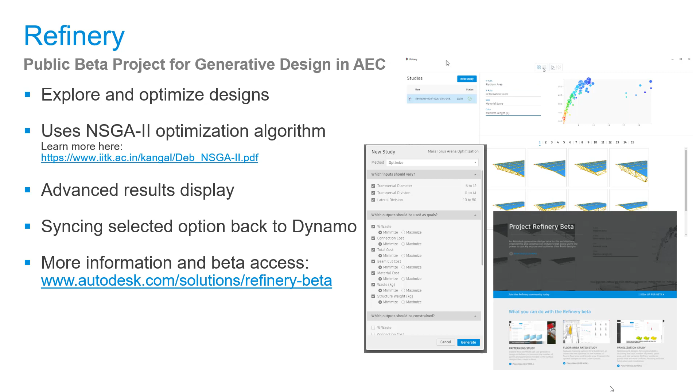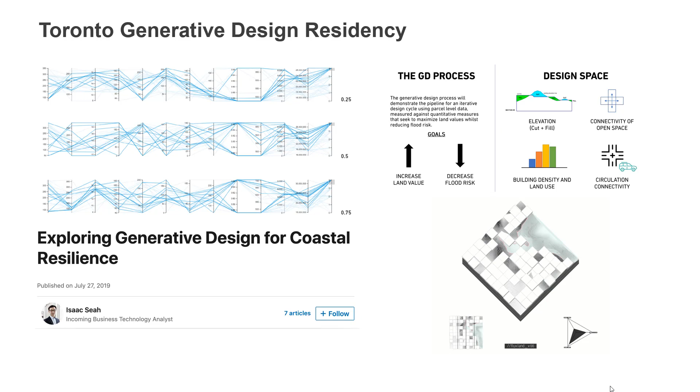Once you have staff in place to work on computational and generative design projects, I would recommend investing in their problem-solving development by providing them learning opportunities at residencies and hackathons. These types of events give developers exposure to high-level approaches to problem solving by their peers and reveal new methods for implementation, such as using bin packing algorithms to solve spatial layout problems.

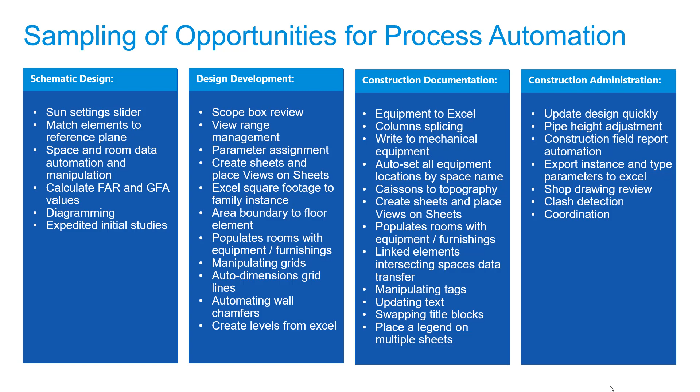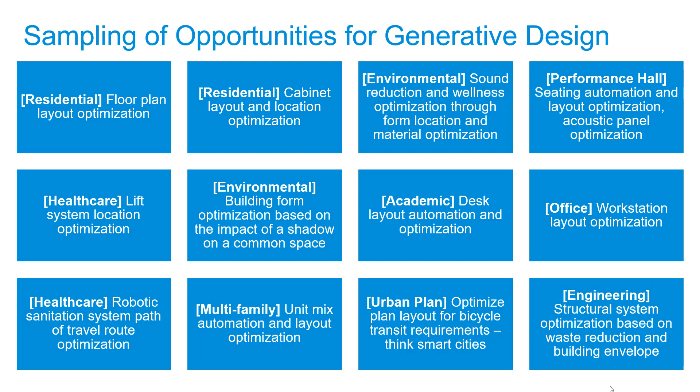In conclusion, implementing computational and generative design in your projects will require a shift in strategy and, possibly more importantly, a shift in mindset that heightens the discovery of values and outcomes. So, after you've automated out the tedium from your processes, where will you go next? Experience research? Sustainability research? How about resiliency research? I look forward to seeing what you will develop in your projects moving forward. And when it comes to making the world a better place, I believe in you.